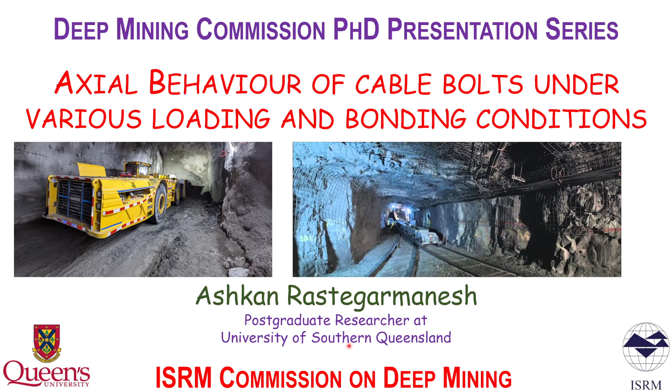Which I completed at University of Southern Queensland in 2022. A brief background about me is that I have my bachelor's and master's in mining engineering, and a PhD in rock mechanics from University of Southern Queensland, mostly focused on cable bolts. My industry background is some mining engineering work and mostly tunnel and shaft engineering works.

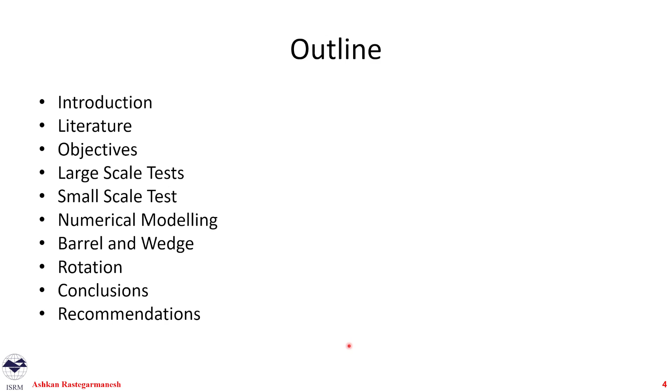Rather than getting into the details of the tests and the graphs and behaviors, I try to mostly focus on pictures and some of the processes that we went through that led to the results that we had. I hope that you guys enjoy it, and you can always go back to the thesis and the papers for the details and all the other small details that you might be interested in.

So what are cable bolts? The name cable bolts basically means, in mining, a type of support structure that's very similar to a rope. It's like a normal rope made of fabric or plastic, but here it's made of steel, made of metal. Sometimes it's called wire rope, but we call it cables for sake of brevity here.

Cable bolts are basically made of strands. Strands are individual parts of the cable that are wound together and make a cable bolt. That's a terminology I'm going to use here. I put two pictures here from 1996 and the 2000s, and you wouldn't be surprised if you study other works of cable bolts to see different nomenclatures for different parts of the cable. For example, in this picture the author used the term strand for the whole cable. But for my study going forward, I'm going to use the term strand for what here is called a wire, and the cable is the whole unit together.

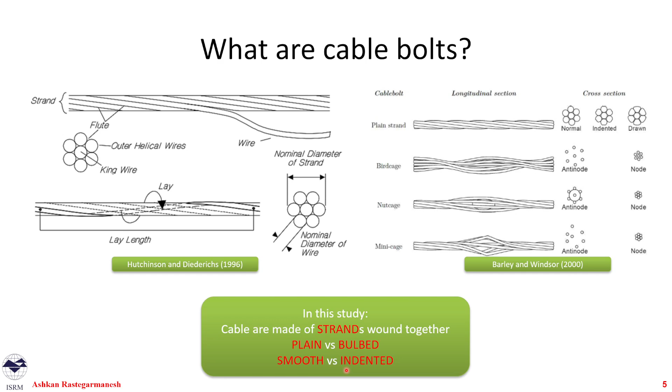So the first question that many people ask is what's the difference between cable bolts and rock bolts? And why do we have two of them?

Cables are flexible, physically flexible, so they bend and have lower bending moments. That means you can put a large amount of them on a drum and deliver them inside the underground space and apply them. One limitation of rock bolts is that rock bolt length is always limited by the size of the opening you want to support. If you want to put a 4-meter rock bolt in a 2x2 or 3x3 space, it's basically impossible.

But cables can be stored in a drum, basically wound around it and delivered and used there. So cables can be longer.

The cable making process is different from the rock bolt building process. We won't go into details, but rock bolts are generally made by quenching, so they are very hot and put in liquid, that's how they're built. Cables are made by cold drawing, which is a different process.

For sake of conversation, cables can go up to 1800 MPa, more or less, but rock bolts are usually around 400, 500, even less MPa uniaxial tensile strength. Even though cables and rock bolts on paper have higher nominal surface area because they don't have all those small voids and bits and pieces, at the end of the day, because the building process is different, cable bolts are usually able to carry more stress.

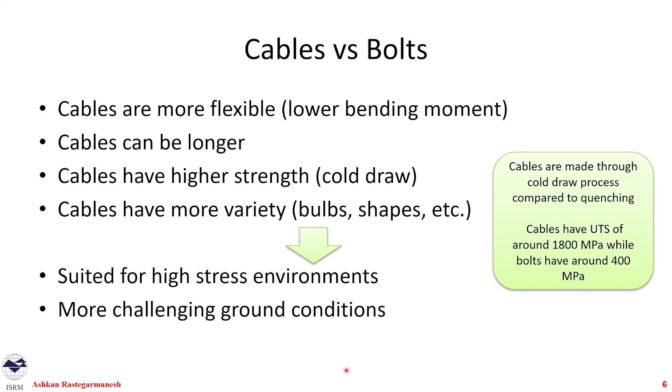All in all, that means cables are very popular in high stress areas because sometimes you need much longer cables that go deeper into the ground, and some challenging ground conditions have lots of movement or unusual and unconventional stresses and changes in ground condition. So cables tend to be more suited for those areas.

When we want to study cable bolts, there are different ways we can break it down. I use this terminology here, and you're free to follow it or not, but this is something I used for my PhD. I use the term tendons as an overarching term for rock bolts and cable bolts. Here we are studying cable bolts.

We can study them in shear and axial. When we study cables in shear, we are basically guillotining the cable where the movement of our blocks is perpendicular to the axis of the cable. In axial, the movement of the cable is basically parallel to the movement of our block, so we are basically pulling the cable out.

In shear, we can do single shear and double shear, and in axial, we can do single embedment and double embedment. The difference between them I'll briefly mention down the line in the next few slides.

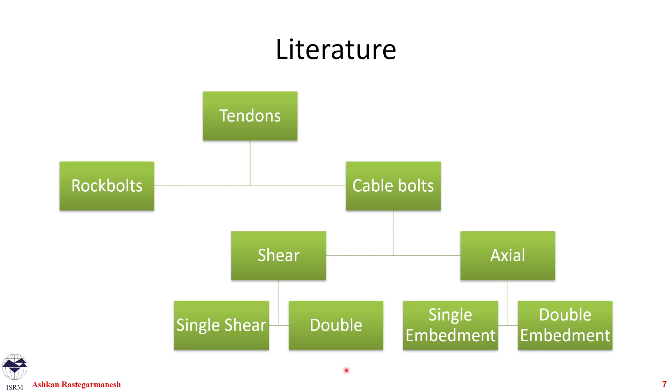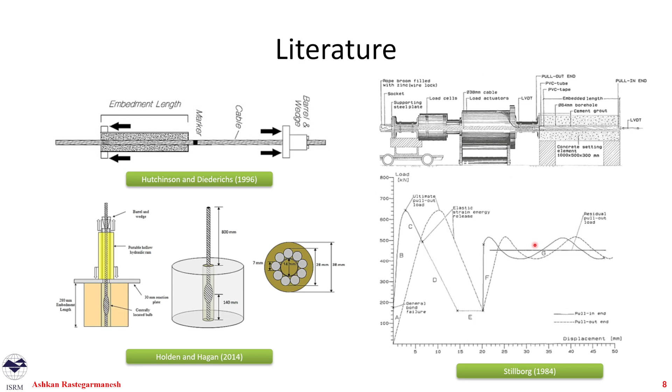There have been many studies on cable bolts over the years. Some studied them in a single embedment test, which is very simple: we had the embedment section where the cable was grouted or resin inside, and the cable was pulled out. You see some of the works done over time and different types of tests, and the typical graphs you get from them, where you have an initial load pickup and then post-peak oscillations or behavior shown in the corner.

Some other tests are examples of work people have done in this area. You see, for example, tests where you were able to fix the radial stiffness and pressure during the test around your embedment length, or tests where you stop the rotation of the sample.

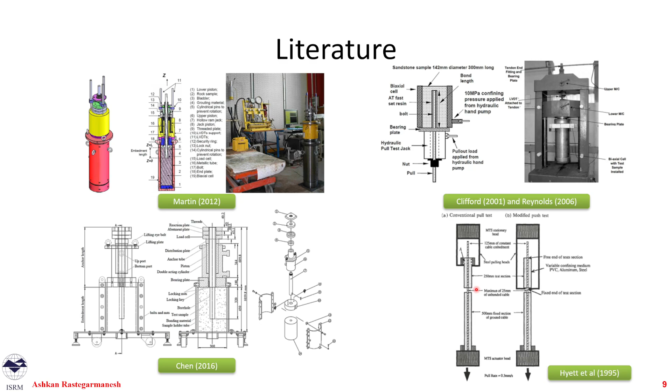Or here on the corner right, you see a double embedment test, where you have two embedded sections and you're trying to force the cable to fail in one of those sections. The main reason we had them was because of the termination method, which hopefully I'll mention down the line.

Looking at the analytical and pull-out behavior of the cable, what we mostly accepted is that when you start to pull out a cable or rock bolt, you are not mobilizing the whole length of embedment at once. So if you have a 10-meter cable in the ground, pulling out from one side, you're probably only using a fraction of the length of the cable, and that's the length of pickup you see. This is sometimes called a zipper effect in industry when designing the capacity of cables and rock bolts.

Over time, as we increase the load, you have a point of peak axial stress, sometimes called a neutral point. Towards the collar, you start to have diminishing stress, and your load pickup section keeps moving, and this debonding plane starts to move towards the end of the embedment column. Eventually you get to a point of full debonding, so you have no capacity.

This is something that has already been seen inside instrumented rock bolts and cable bolts during pull-out. So this is something we more or less accepted: you have a pickup length, a neutral point, and an anchoring length, and over the length of the test, this keeps developing.

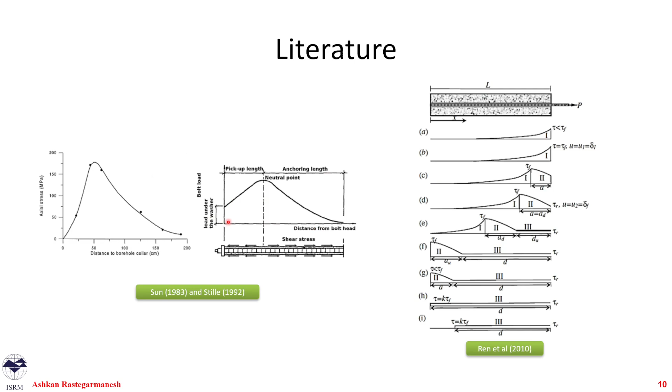The objective of my research program, my PhD, was to have tests that give us the load and displacement curve. We wanted to test larger scale and smaller scale tests. Larger scale tests are very expensive, time consuming, and difficult to do. For smaller scale tests, we wanted to have an alternative and test that. We also wanted to test grout versus resin, so chemical resin and cementitious grout.

We wanted to see the effect of the barrel and wedge, because one reason we have single and double embedment over the years is that to terminate the cables, you can either use a barrel and wedge, which is the assembly to stop the cable—this is what's used in industry—or you can remove that due to complications and put another longer section of embedment length that forces the failure to happen in the other smaller section.

We wanted to study the effect of rotation, a convoluted topic mentioned in other studies. And as a continuation of rotation, we wanted to see the effect of the entry and exit point—entry point being where the fresh cable goes inside the column, and exit point being where the cable comes out when you're pulling it out.

We wanted to see the effect of monotonic and cyclic testing. Cyclic testing for us was mostly about what happens over the design length of the cable, and basically seeing if any deterioration or load loss happens when the cable is installed underground, during different stress changes and different displacements.

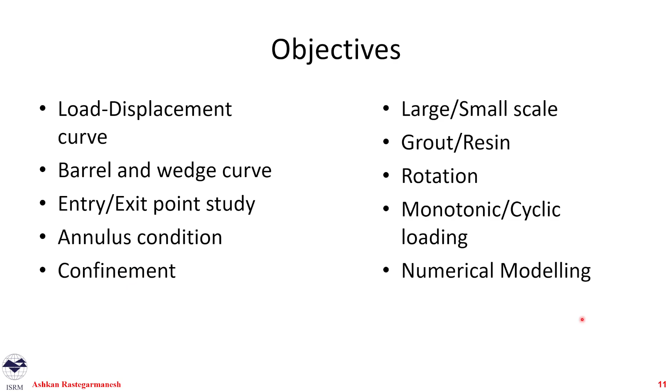So the larger scale testing that we did—this is the final version of it—had a few features going for it. We used concrete instead of rock because it was easier to cast and procure on site for us.

We used a split pipe confinement. So around the external confinement of our concrete was basically a big pipe that we cut in half, and we put flanges on it. On those flanges we put bolts, and we used the preload torque on those bolts as one of the variables of our test.

We sort of used a double confinement test, even though we used a barrel and wedge. We had the anti-rotation plate, a plate that went on top of our sample, confining the top end of the sample. Inside this hollow ram jack, there was an anchor tube that would slide inside it and stop the rotation, moving the rotation to wings connected to the external confinement, so everything was moving vertically up and down together.

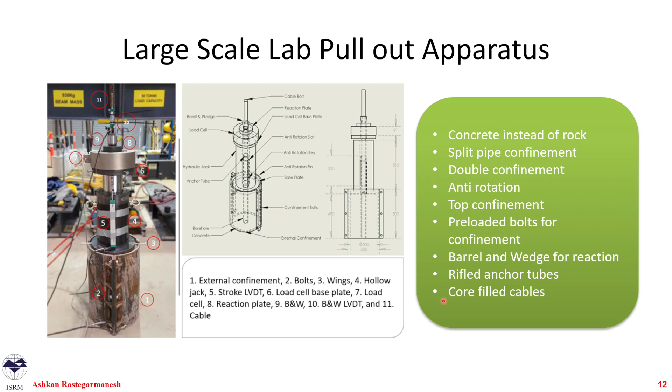I already mentioned the preload on the bolts and the barrel and wedge for reaction on top—here in this picture you see the barrel and wedge. We had rifled anchor tubes to make sure anchor tubes are not debonded, and we had core-filled cables, filling the inside of our cables. So those are some of the things we had going for our test.

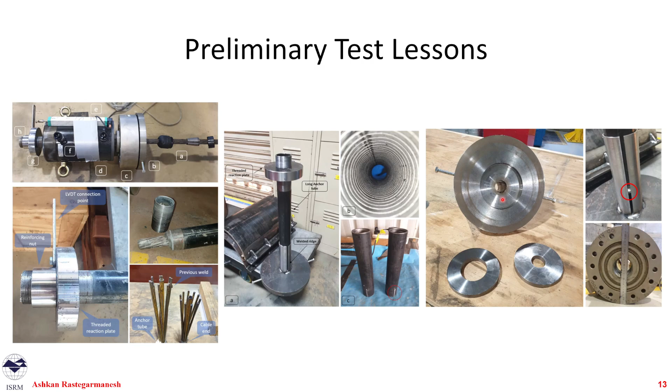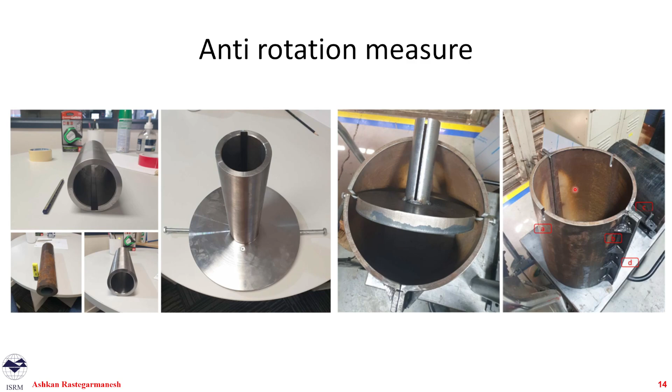borehole when we are pulling out the cable, and different versions of it. This was the anti-rotation plate that we ended up with, which is a much more robust way of doing it. And this is a picture, on the right, of our external confinement.

The cables that we used throughout this study, we used 6 cables. All of them were provided by Jennmar, which is one of the biggest providers of cables and rock bolts in Australia. Here in this table we see the details of them: the diameter, and the breaking point load at the strand and barrel and wedge.

So we had 2 smaller cables, these 2 cables here. One of them, these 2 had around 22 millimeter diameter, and one of them was a plain cable, the other had indentation on it, so it was an indented super strand. The name of them was super strand, that's a commercial name. So IDS or SS, that's how we refer to them.

The other cable was a 100-ton cable, which is a plain cable, the highest capacity cable at the time, a very big cable, the Goliath cable, or we call it Gol. That's a code that we use.

And we had 3 cables with bulbs in them: 9-strand cable, 10-strand cable, and 12-strand cables. These are the details of them which we see here. The commercial name of them was Sumo cables. And we see them here.

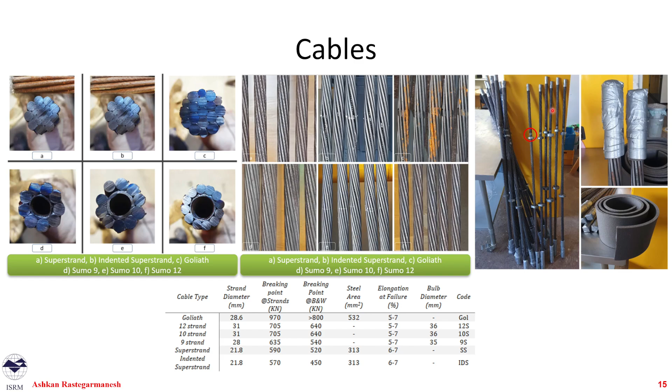This was the cables when we prepared them. We had a foam on the bottom section. The reason was that we wanted to have 300 millimeter embedment throughout the test, so we added another 150 at the bottom. So when we pull out 100, 120, we still have fresh cable inside our column of embedment, so we don't lose embedment over time as we are pulling out our cable. And some other small bits and pieces that were necessary for a test.

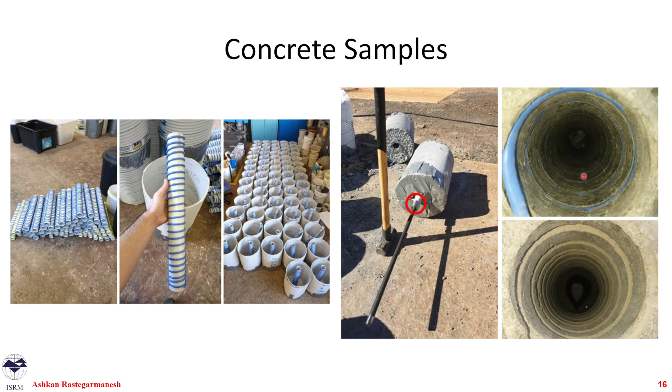For our concrete samples, we had column formworks, 300 mm in diameter. We cut them to 450 length, and we had PVC pipes, which were our boreholes. The diameter of them was based on the manufacturer recommended diameter of annulus for each cable. We put wires around them to have a sort of rifling, to make sure that our failure only happens at the cable-grout or resin interface, not between the grout or resin and rock interface.

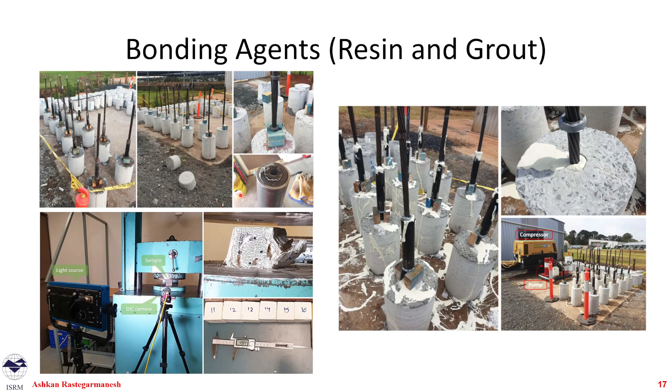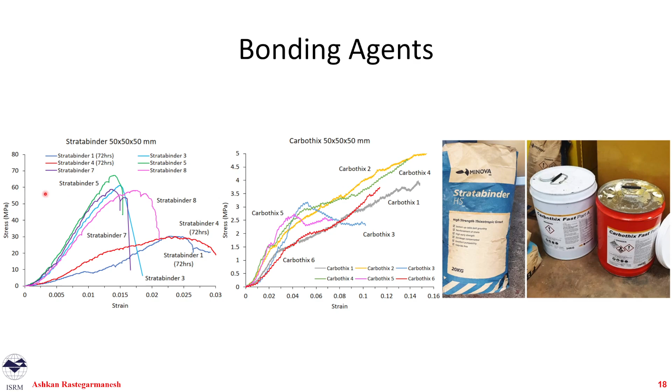There's some testing that we did on the samples. This is the load displacement curve, or stress strain curve, for the cementitious grout, which was a stratabinder, a product of Minova, and our resin, also a product of Minova, for Carbothix. Minova is another very big producer of this type of material. What's notable is that our resin type of failure is more like a strain hardening with much lower loads compared to our cementitious grout, which had a behavior very similar to cement or concrete.

This is a final picture of the test, showing different parts of it. The output from the test: we had 2 LVDTs for displacement and 1 load cell for load.

This green line was a load cell value over time. Typically we had a load pickup, then we got to a peak value, followed by oscillations. Each of these oscillations was accompanied by a very loud noise and a jump of the sample. This orange line is the stroke, how much vertical displacement or pull-out happened. This small blue line is the movement of the LVDT at the barrel.

After the test, we opened up the samples. You can see the inside of them: that's the external confinement, that's the infill grout, the concrete which was our main confinement, our grout, our cable, the foam I mentioned, and those holes for the bolts we put there. This is the same on the right. We see the same for the resin.

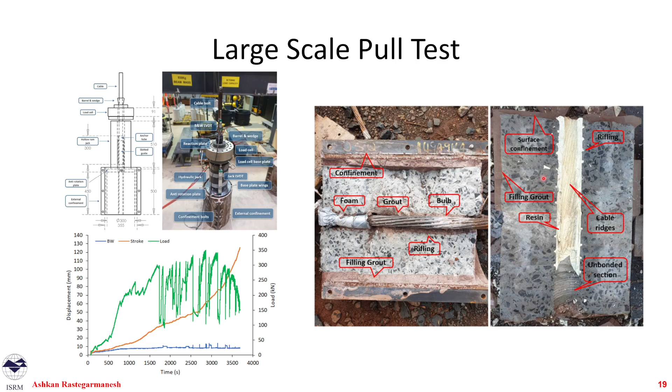These are the types of graphs we get from our samples. I'm not going to go through each of them, the details are in the thesis, and the explanation of all of these graphs are inside the papers. Please feel free to go and see them. But this is just an example of the output we get.

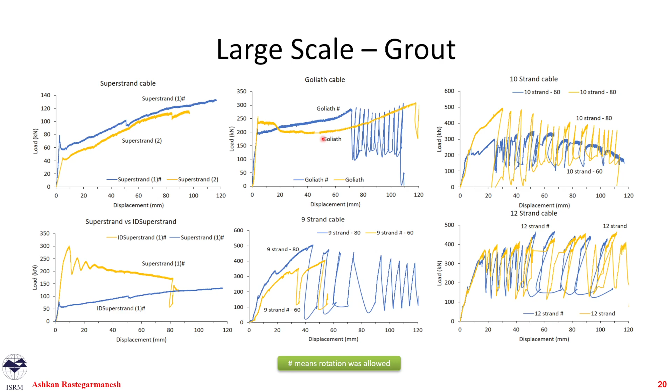Our hashtag basically means we let rotation happen, and when there's no hashtag, rotation was constrained during the test. For different cables we see different values. For our bulbed cables, we see lots of oscillations. For our smooth cables and plain cables, we see more of a strain hardening situation, and our post-peak is not that different.

After the test, we broke our samples. One main observation was that we get lots of radial cracking starting from one of these flanges, reaching the cable, and continuing to the other flange, regardless of what torque we put on the nuts. This only happened in the bigger cable; in super strand cables, which are smaller, this didn't happen.

After the test, we broke our samples and studied the type of damage we get. We realized that uniformly throughout this whole PhD work, the damage tends to be non-uniform. Towards the exit point, or towards the collar on the right, we get lots of damage and a crater with dull edges. As we go towards the bottom section of the sample, we see very sharp edges and very little damage.

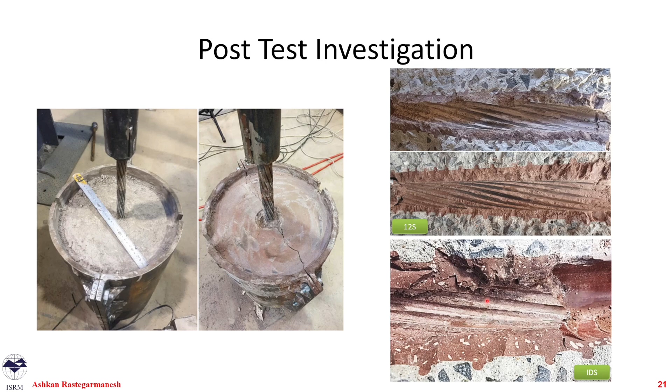This is an example of an indentation imprint on our grout, which you can actually see clearly. That means it's actually something useful and it's working.

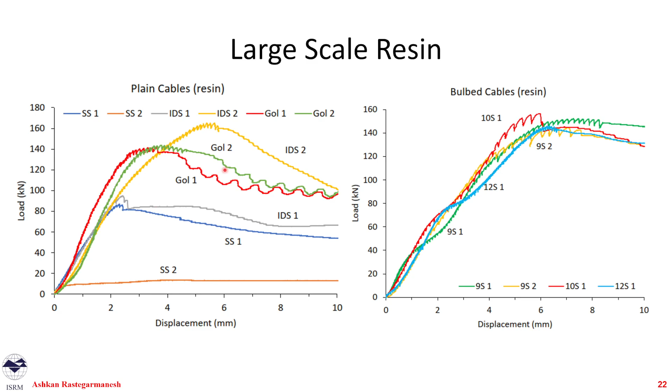Again, some of the larger scale resin graphs, as you can see, for bulbed cables all of them tend to bundle together around 14 tons. For our plain cables, we see different variations, but our overall load value seems to be the same.

For our cyclic testing, what we mean is that we did the monotonic testing, got the peak value, divided it by 5, and made 5 equally spaced loading and unloading cycles. These are the unloading and loading cycles we see. Our aim was to see what happens over the life of our structural element when we have changes of stress or environment in the mine or underground space in tunnels.

That's an example of our behavior and how our load pickups happen. For example, in the 9-strand test, we see that most of them happen in the first 10 millimeters of the test. The details are inside our published work.

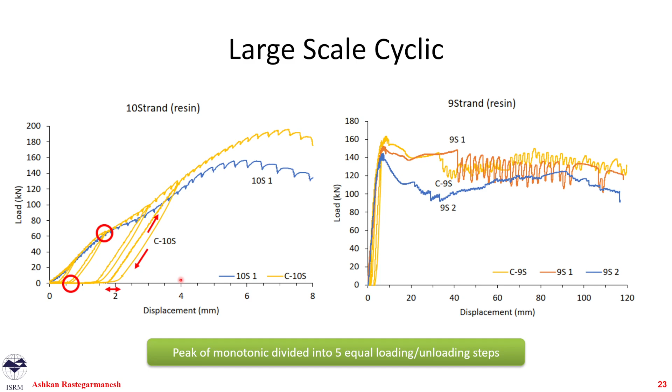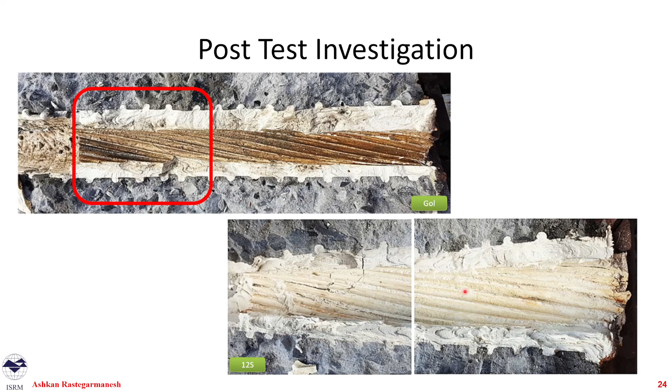Post-test investigation for our cyclic test shows the same thing. We see very sharp edges and very good lugs, or ridges in between them, at the entry point. But towards the collar we see more damage. Because the resin is more ductile, we see less of a crater. In another example at the bottom, we see more damage towards the top, and as we go towards the end, we see less damage.

Then we did a smaller scale test. The development of that was that we wanted something smaller, faster, cheaper and easier to do. So the initial idea was to use an MTS machine, a multi-testing machine that does compression and tension together. It has a crosshead, and we had the same anti-rotation setup.

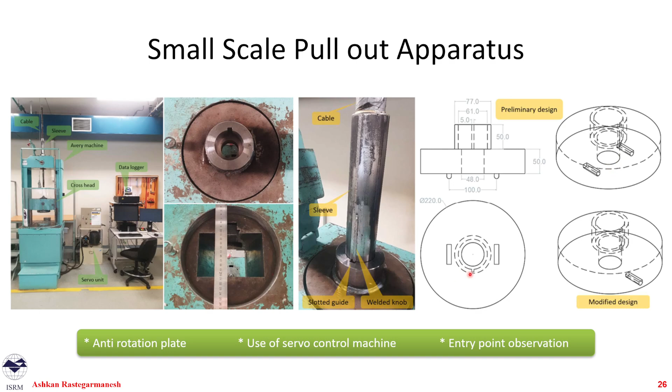We had the anchor tube, or the sleeve, that we wanted to pull the cable out from. On the right, you can see the design we had for our anti-rotation system, which was very similar. We had a welded knob that would slide into a small slot there.

We did the test and realized a few issues. The grip of the machine will break the cable, and when the cable breaks, it disintegrates. So we realized we have to put some welds around our cable to make sure that if one of the welds fails, the cable doesn't just end up like this.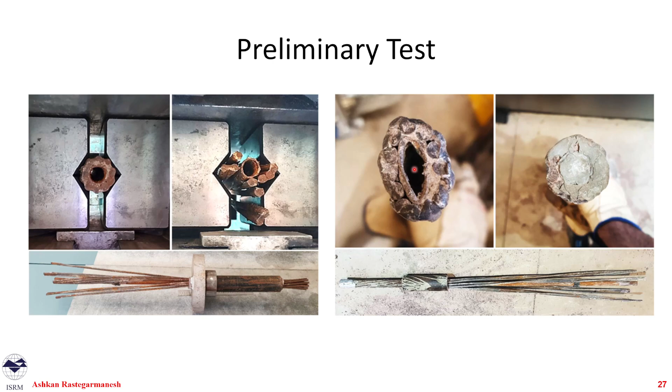We realized that we need to fill out our cables. Most of them are already filled, but our hollow cables, which were our 9S, 10S, and 12S, needed to be filled, because when they are empty, the grout hole, or breather or bleeder tube inside the cable, is going to get crushed.

The other thing was a change of resin, so we switched to a different resin called Geoflex, from the same company, Minova. This one had a different type of failure, like a barrel-type failure. It was a strain hardening behavior, it wouldn't even fail, so we had to go up to like 2% strain to get our UCS value for it.

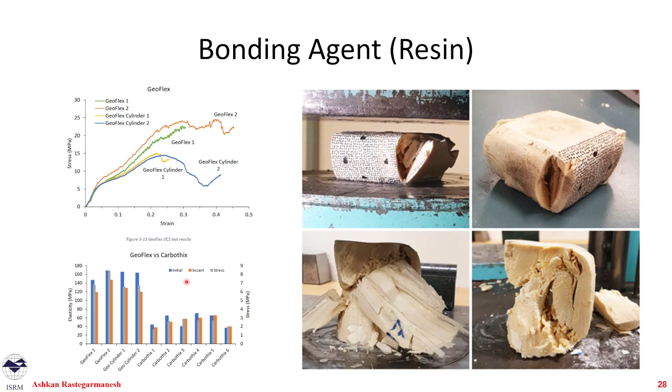You can see the difference between the GeoFlex and Carbothix, which was the previous resin for the larger scale test. Both our UCS and our Young's modulus are much different between them.

For sample preparation, as you can see on the left, this was our anchor tube length. After the preliminary test, we realized that a 300 millimeter anchor tube was too long and it would break the cable, getting very close to the yield strength of the cable. So we went for 150.

We had the same anti-rotation weld on it, and we put some extra reinforcing welds on the top.

In terms of the location of the bolt, we wanted enough utilization of the length of the bolt. So we had the 150 located in a way that we have 100 mils of displacement. Once we pull out the cable in this direction, the bolt actually moves through our annulus for at least 100 mil.

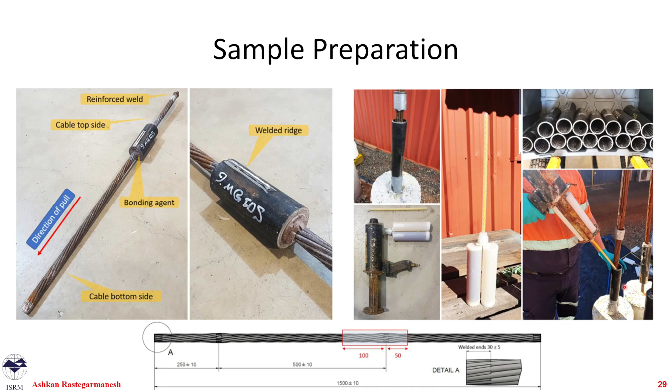On the right, you see the resin injection. Again, this was a two-part resin with the air gun, which would get mixed with a straw, and then we inject the grout into the embedment length that we wanted to pull the cable from.

This was the final test setup. We had a different, much better machine. We had the anti-rotation section at the bottom - you can see the details of it there - and the pull-out mechanism. At the same time, because now we had access to the entry point of the cable, we were able to put a camera and study that.

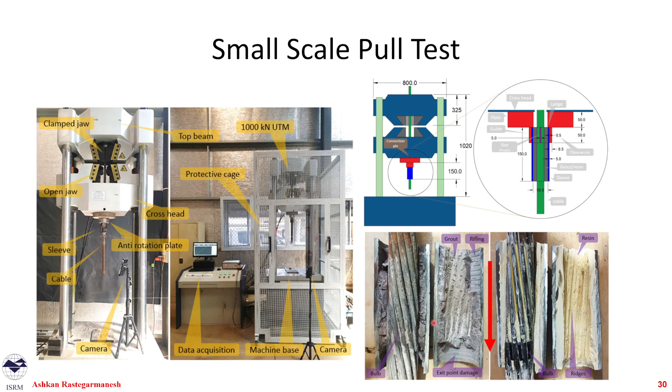On the right, you see the broken cables and how they look, the broken samples after the test. For grout and resin, our resin is more ductile, so we see less brittle damage, but our grout shows more damage, and you can see the direction of the pull here.

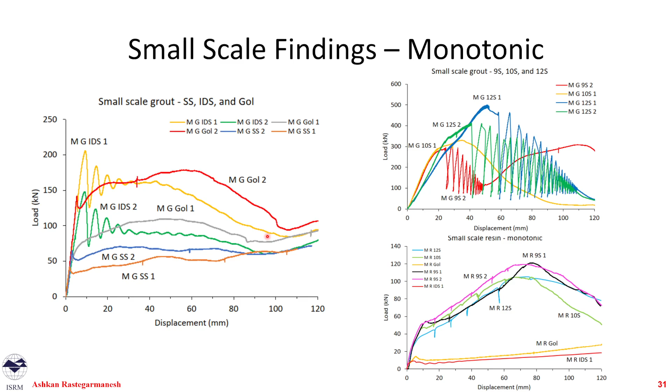The type of graphs that we got from our test are like this. Our post-peak behavior now shows post-peak oscillation that is more attenuating, so it just tends to go down. For our resins, we see a type of strain hardening behavior. Again, the details of all of this are inside the papers we published and the thesis itself.

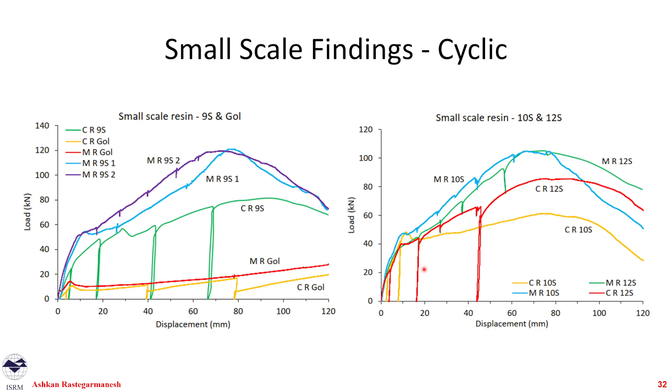For our cyclic tests, the cycles are now much more spread apart compared to the larger scale test, which was mostly in the beginning of the test. Now we have much more values, much more displacement, and a bigger gap between each of our cycles.

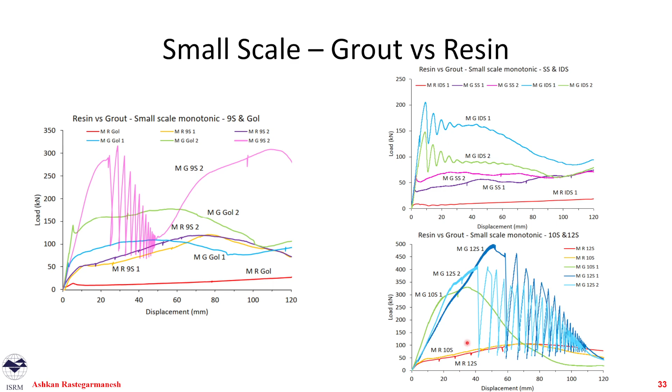The difference between grout and resin for our smaller scale test is basically that our grouts are again superior. We are getting much higher load values compared to our resin values, which are much less and much lower.

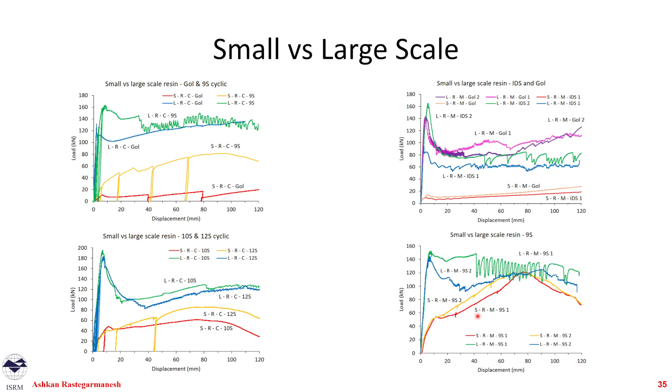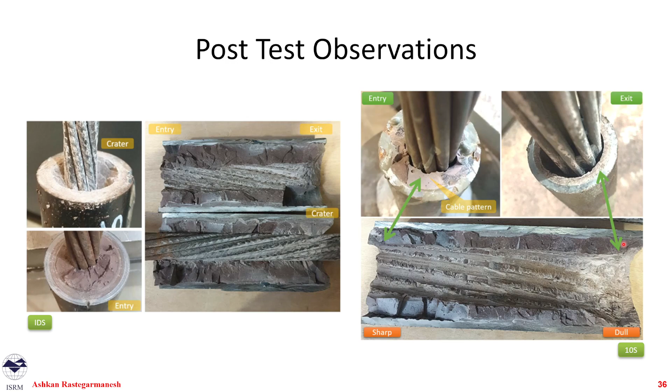Post-test observations: in the smaller scale test, we get a crater at our exit point, on the top. On the bottom point, we get a little bit of mismatching between the cables and the lugs that the cables were initially cast into. We see the damage, similar to larger scale, on the right section, which is our exit point - basically a crater and much more damage. As we go towards the bottom section, we see less damage.

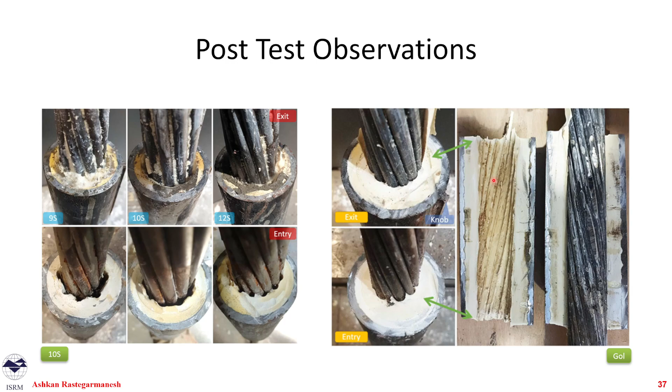This is the same observation for resin. Obviously resin is more ductile, so we don't see that brittle failure, but you see the mismatch of the patterns of the cables compared to the lugs they have on resin, and on the top we see the damage. Again, in terms of the sharpness of these lugs and ridges, we see that as we go towards the entry point they become sharper and the damage is less.

Numerical modeling: we wanted to use the data from our experiments to calibrate a model. We decided to do a 2D model, and in 2D we realized axis symmetry is better. But the problem was that cables cannot be modeled as axis symmetric because they have out-of-plane rotation. So we had to compromise and model the cable in 3D, get a cross-section of that, and assume that cross-section is constant during the revolution that happens during axis symmetry.

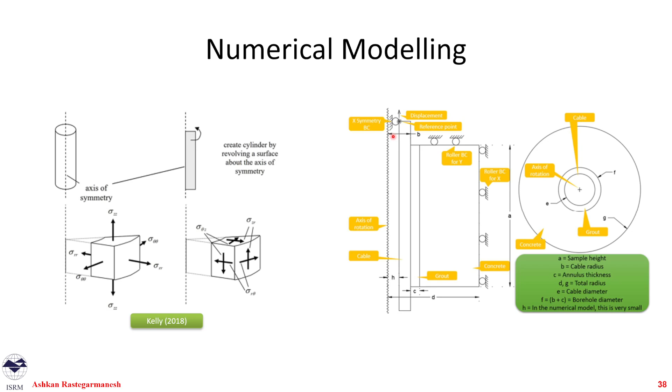This is our boundary condition: we have a roller on the top, roller on the sides, and our axis of symmetry has the roller too. This is our cable, our annulus, and our concrete here.

For our interaction model, we used a normal mu-s and mu-k, the static and kinetic friction coefficients. We assume a very high friction coefficient of mu-s for static. When debonding happened, we lowered that value to a residual value, which was our mu-k. For calibration of these values, we used the testing we did during our experiment phase.

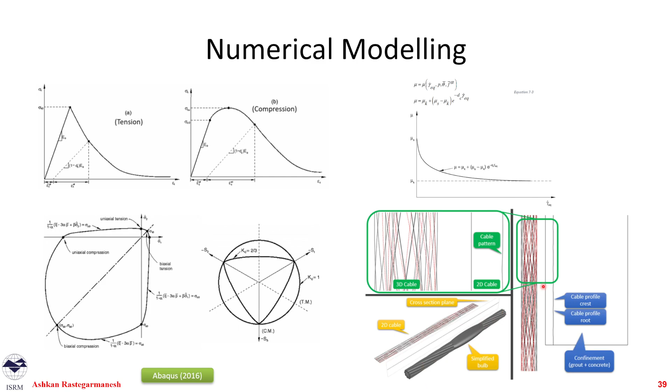For our plain cables, we got a good fit for the load, but our displacement was mostly double.

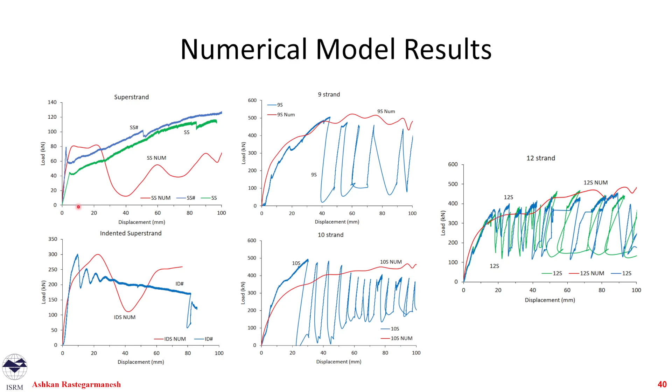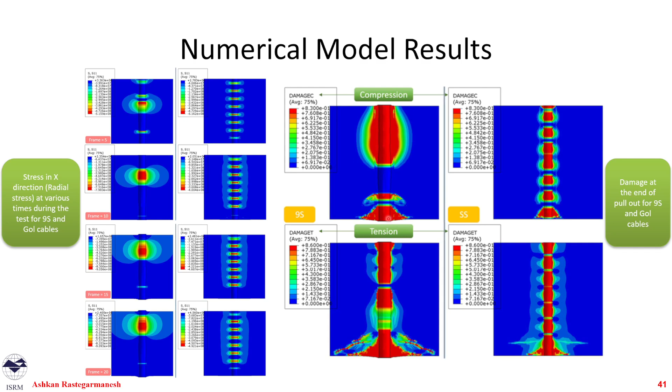In this whole section we see only the damage output, which is compression damage and tension damage. Our numerical model in Abaqus is telling us we are developing some tension and compression damage at the entry point, but we haven't seen this in the experiment phase. That means our numerical model has a little bit of work to do to figure out these details.

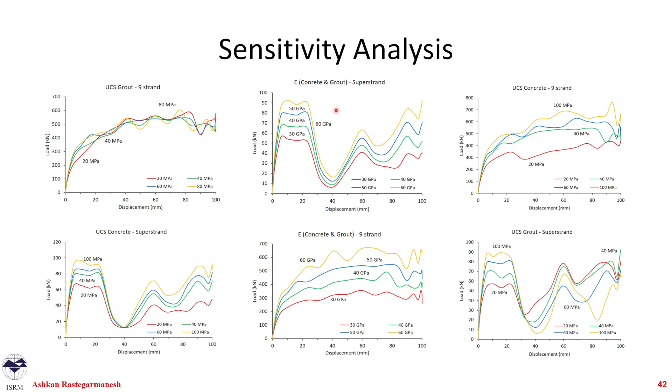Once we calibrated our model to the best of our ability, we did some sensitivity analysis to see the effect of changing different things. We changed the UCS and modulus of elasticity, and realized that for our bulb cables like 9S, the effect of the change in E of the concrete and grout has a major effect. For the UCS of the grout and concrete, the grout has little effect, which is interesting because you don't expect that, but the concrete has a high effect. The modulus of elasticity actually has a higher effect for our 9-strand bulb cables. But for our super strand cables, the change in UCS of the concrete and grout, and the modulus of elasticity, has a higher effect on both of them.

The other sensitivity analyses were on the diameter of the cables, the diameter of the bulb cables, the plain cable, and the change in diameter of the bulb. As we can see, the change in diameter has a major effect. However, the most interesting thing is the change of the bulb. Even a 2 millimeter change in the bulb, making it smaller or larger, can have a significant effect on the load value. It's easy to see that even a 2 millimeter increase in bulb diameter gives us almost twice the load, or in the opposite direction.

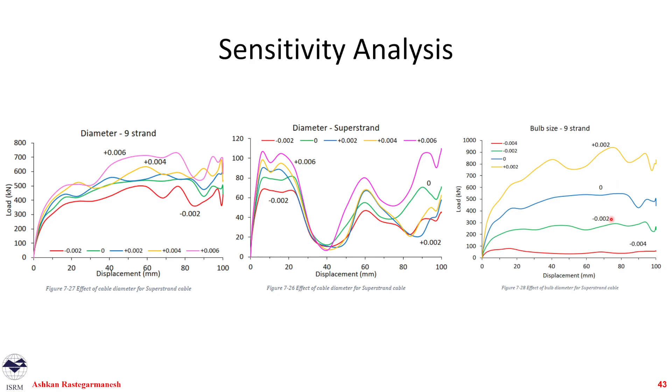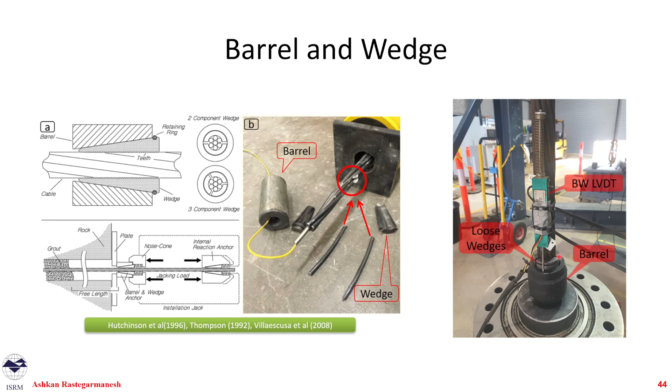We studied the barrel and wedge, as we mentioned in the beginning. We put a dedicated LVDT on top of our cables, tied to the cable and resting on the barrel, to see the movement of the barrel relative to these wedges during the pull-out test, to see how much energy or movement is lost. The output we got was that for different cables, we get between 5 up to around 9-10 millimeters of movement during the test.

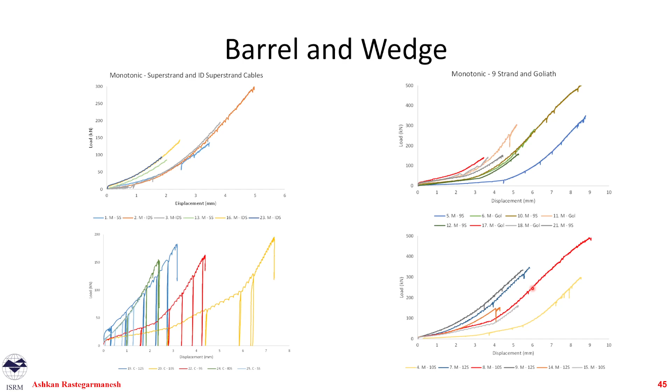Remember that for this 9 millimeter value, the cable has already moved 100 millimeters, so around 10%, less than that, of the movement is actually stored in the barrel and wedge. We realized that for cyclic testing, our barrel and wedge basically have permanent displacement, so we have instantaneous load pickup, meaning we don't lose anything once our cable is unloaded and loaded again. One minor thing we realized is that our bigger cables, compared to smaller cables, have a deflection point behavior, which might be attributed to the type or design of the barrel and wedge. It's a very minor thing.

The other topic was rotation, a very interesting one. First we need to differentiate between different types: unscrewing and untwisting. Unscrewing means that when you have cables with strands inside the grout or resin, and you pull out the cable, because the path of least resistance is for those strands to slide inside their own groove, they unscrew themselves out of the grout. You can imagine pulling a bolt and nut apart, because the pattern is similar, so you get a little rotation.

Untwisting, however, is the tendency of the strands of the cable to straighten themselves, to come out of the wound position into a straight position. That happens because when you have a vertical load along the axis of the cable, you develop lateral load that pushes against each of the strands, and they want to straighten. So untwisting and unscrewing happen at the same time when we observe rotation.

Unscrewing happens inside our grout column, and untwisting happens on a section of the cable that's coming out of the grout column or resin column. So what we did is study the geometry of the cables, realize what's the lay angle and lay length, and determine after 100 millimeters of movement, how much rotation they should have.

After each test, we realized that regardless of whether our tests have rotation constraint or not, our samples will rotate. They either rotate during the test, or we constrain the rotation, and at the end, when we release the load, our samples start to rotate and go back to a certain angle. This value is the rotation angle we measured after the test.

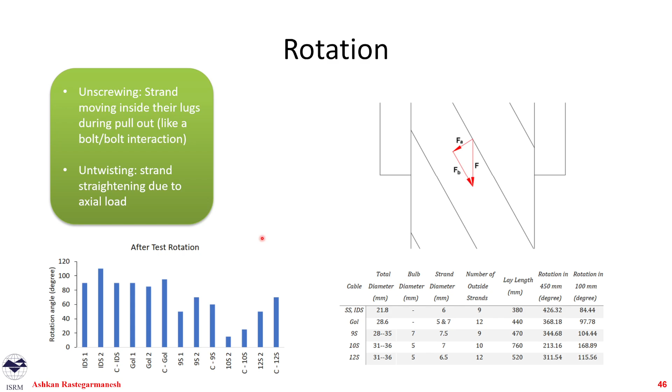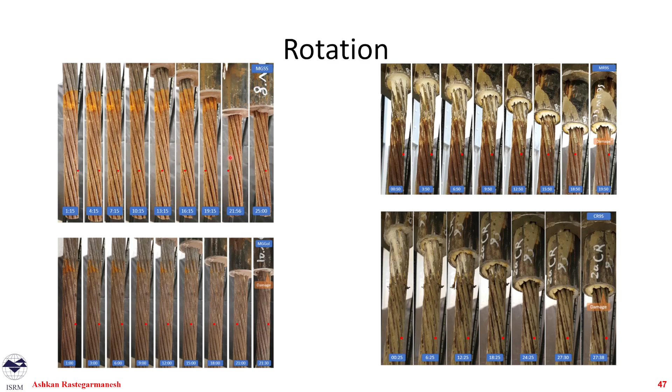For resin, again we see the same thing, but this is a bulb cable. In these two bulb cables, we actually see less rotation during the test at the entry point, and when it finishes, it almost goes back to the original position. We can postulate this is because the bulb is damaging and scraping the inside of the annulus compared to plain cables. It makes a way for itself to not store the rotation, so the cable eventually moves back to where it was. But in plain cables, the strands are basically traveling through the path of least resistance.

A couple of take-home notes or conclusions. Confining medium has a major effect—we already saw that between the large and small scale tests, and for the preload torques on the bolts. The preload of 80 compared to 60 Newton meters had up to a 50% effect on our test. Rotation overall had little effect on our test, though we obviously need to study it more.

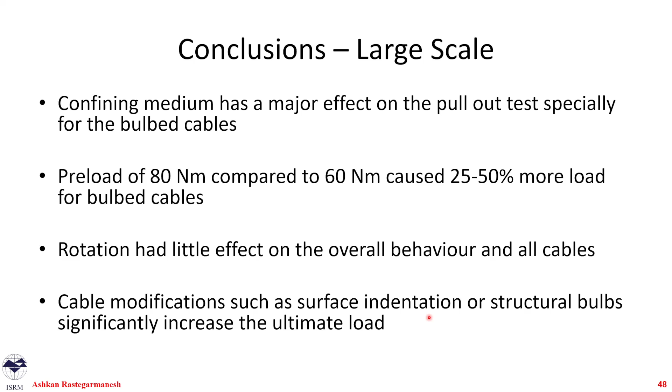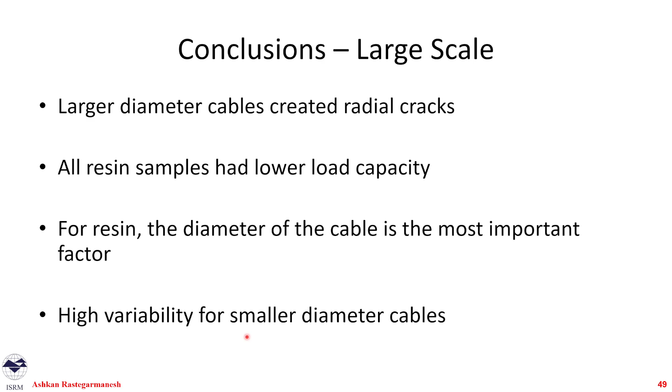Cable modifications such as surface indentation and structural bulbs significantly changed the behavior of the test. Larger diameter cables create radial cracks, if you remember the picture. Our resin samples had lower loads, and for resins, the diameter of the cable is very important. We are not getting, in general, good variability for smaller diameter cables compared to larger ones, regardless of which test we are doing. Cyclic testing had little to no effect, so it's safe to say it has almost no adverse effect on the behavior.

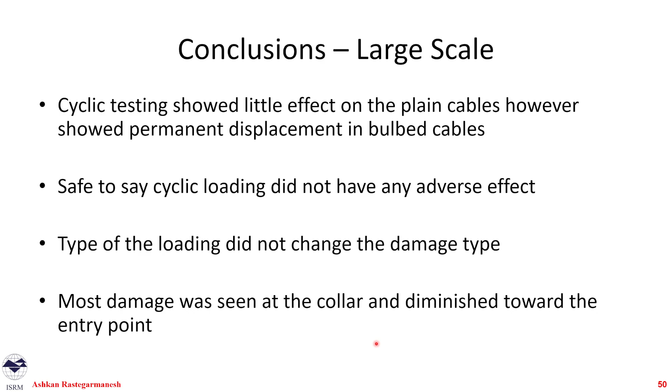Type of loading did not change the damage type, so the post-test inspection for both cyclic and monotonic testing was almost similar. One uniform observation was that the damage tends to be more on the exit point, on the collar, on the borehole collar, compared to the end of the cable.

For our barrel and wedge, we realized that less than 10% of the movement is stored in barrel and wedge, but those movements are permanent, and we have instantaneous load pickup when we do loading and unloading. We realized that the larger cable barrel and wedge have a slightly different behavior, but probably this doesn't make that much difference in the bigger picture of the topic we're talking about.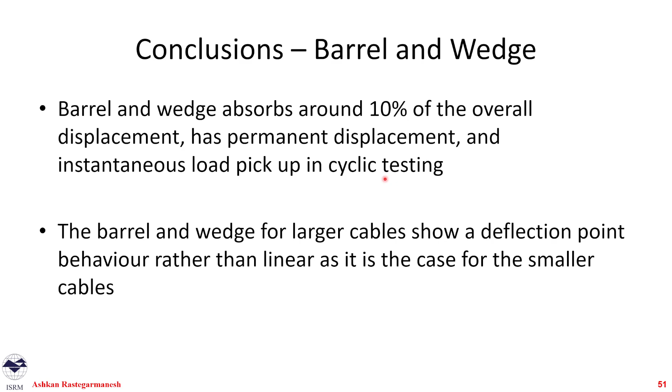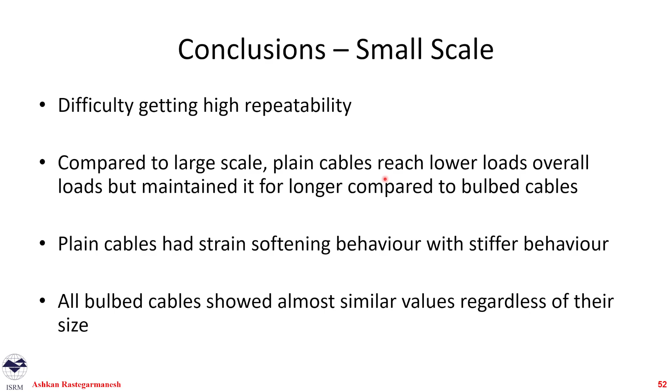For our small scale tests, we realized that it's difficult to get high repeatability compared to the larger scale tests. We realized that the plain cable tests have lower loads but maintain it for longer, sort of a strain softening, compared to the bulbed cables. And we realized that bulbed cables tend to all have the same behavior and same load values, even though they have different diameters or different geometry.

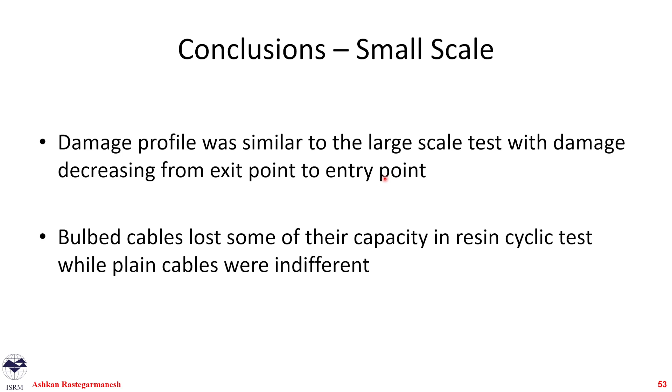We realized that the damage is very similar to large scale tests, so we get more damage towards the exit point compared to the entry point. And the bulbed cables, we realized that they lose some of their capacity in resin cyclic tests, while plain cables were indifferent to the cyclic and non-cyclic testing.

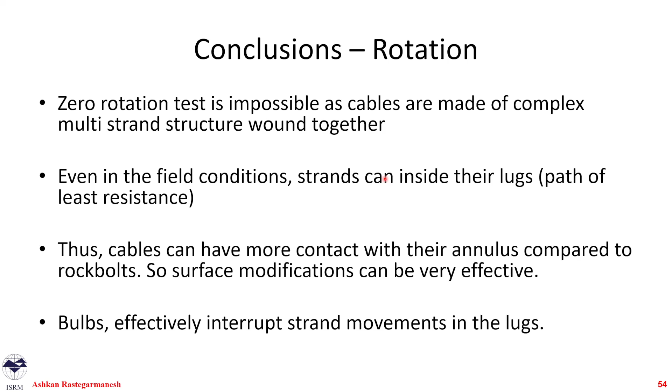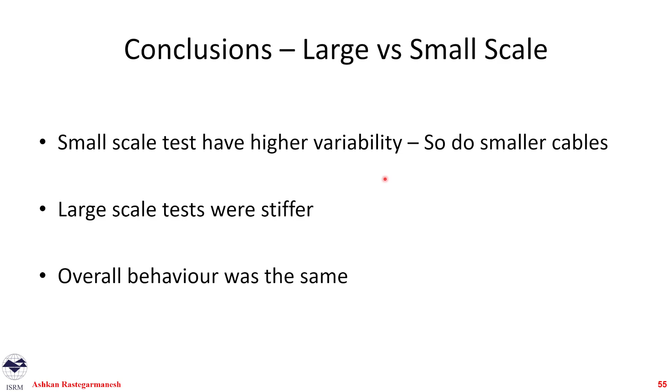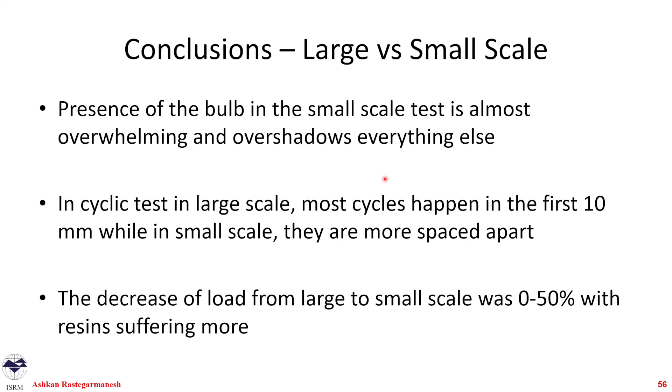For large and smaller scale tests, the presence of the bulb in a smaller scale test basically overshadows everything. So if you have a bulb in a small scale test, it basically scrapes everything off. And most of the cycles in a larger scale test happen in the first 10 millimeters, whereas in smaller scale tests they are spaced apart. And the decrease of the load from large to a smaller scale test can be anything between 0 to 50%. It's not as simple as saying that half of the embedment means half of the load.

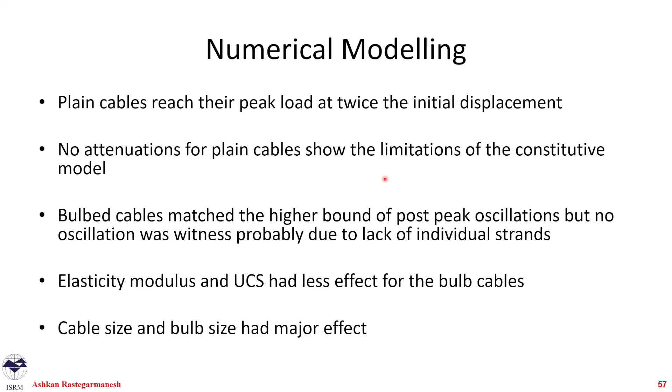We realized that elastic modulus and UCS have less effect for bulb cables, and cable size and bulb size are the most important things. A few recommendations quickly: cable bolts are not just long rock bolts.

So I think we should accept this. Instead of putting passive preload torques on the external confinement, maybe we can come up with a system where we either cast our concrete inside big metal pipes, or use systems that we can monitor and apply different radial stress and radial pressure. These have been done, so we have examples of this in literature already.

Chemical resins are very diverse. What I used during my study should not be overgeneralized for every single resin out there. Resins are very interesting, so we need to dedicate lots of time to see different resins' behavior.

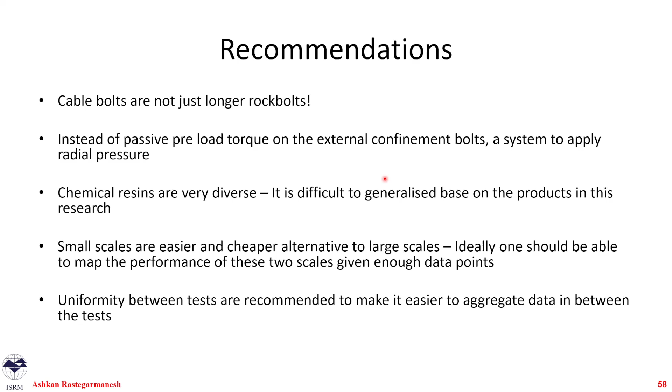Smaller scale tests are an easier, cheaper alternative to larger scale tests, but we need more tests done at both small and large scale so we can map them together and have a function to say, if we do this smaller scale test, that's equivalent to that larger scale test. This connects to the next point: we need uniformity between the tests that different researchers in different countries do on cables, and the size of the samples, so we can easily aggregate the data and compare everything together to have a good data set.

Other types of loading conditions can be studied. Here we used monotonic and cyclic, but we can also use instantaneous loading, like drop tests, or fatigue tests, or push and pull tests. At least we can do them at a low level and see what the effect is, and if they had a major effect, we can dedicate more time.

We can choose different numerical models. For example, something that inherently can dissipate energy or have failure built in, other than FEM, is better. So either a different constitutive model or a different numerical model.

The topic of rotation is very interesting and very challenging. It's not as simple as rotation good or bad, so we need to study it independently and dedicate some time to it.

And the study, everything we did here was laboratory study. So we need field study to corroborate our findings and match them together, so we can see what we found in the lab is actually applicable to the industry or not.

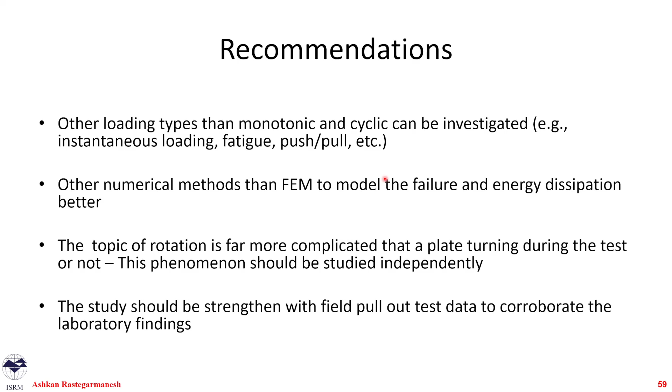At the end of the presentation, I wanted to give you more similar topics from my research group back in the university, which mostly revolve around cable bolts and rock bolts. If you're interested in what I presented just now, you might find all of this interesting too. I put the names of the authors and the responsible people for these studies. We can search their names, or look at the different work these people have done, and you might find something interesting.

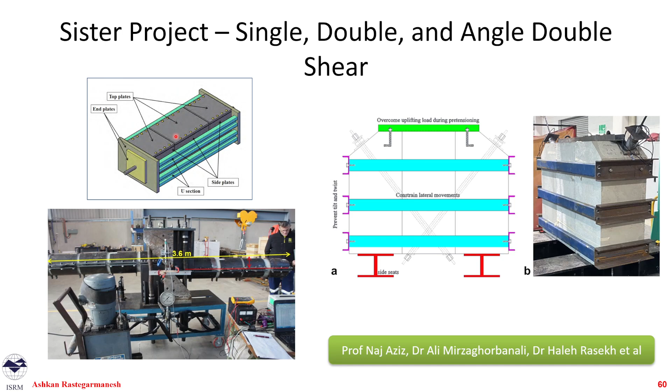There has been lots of work on single, double, and angle shear double tests. These are some pictures of work that has been done. You see the double shear test, single shear test, and angle shear test.

Some of the other sister projects involved drop tests. On the left, you see the pull-out test, but in a drop test, it's like a 500, 600 kilogram weight that drops on top of the samples. On the right, you see the drop test and instantaneous loading on the double shear test.

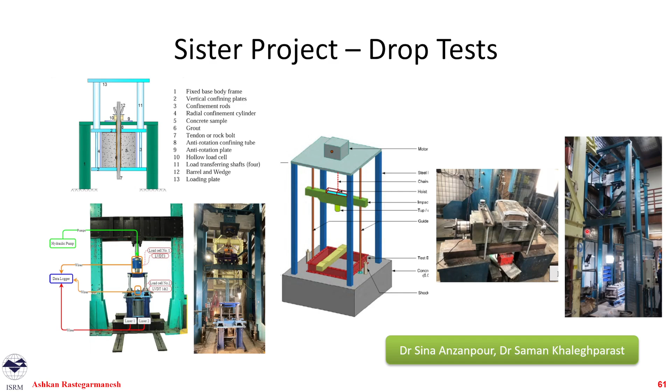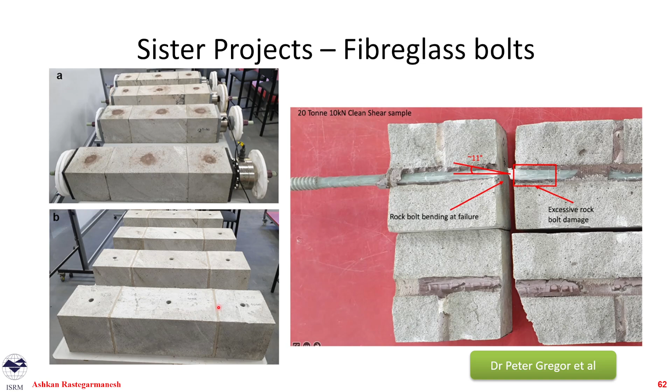Here we see some work on fiberglass bolts. They are very popular these days because they are immune to corrosion, and more importantly, they are cuttable. You can put them in the ground and cut them with your excavator or shearer or whatever you use. We see some double shear testing with some infill material between the joints for fiberglass bolts.